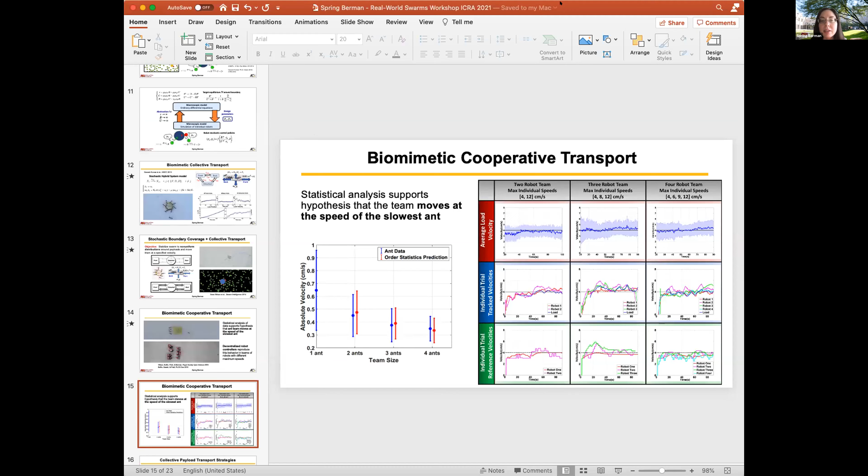Thanks for inviting me to this workshop. I'm Spring Berman, associate professor of mechanical and aerospace engineering at Arizona State University. Today I'll be talking about my group's efforts to develop decentralized control strategies for collective transport of payloads in unknown environments with obstacles, and the various steps we took and are still taking to get there.

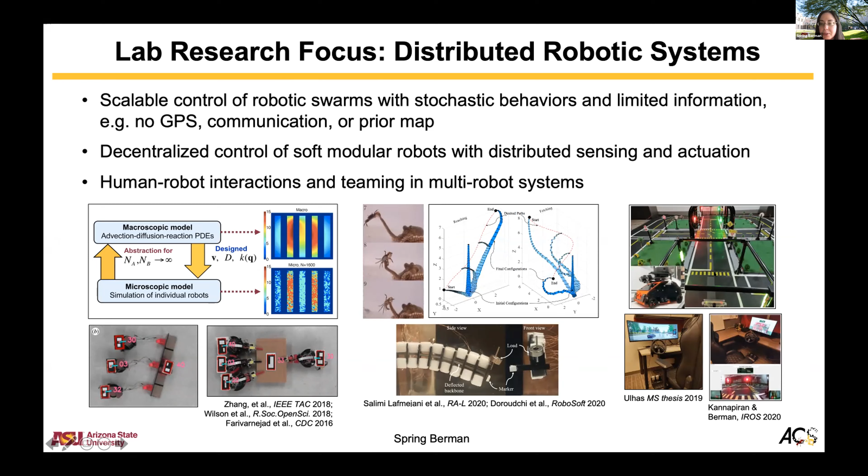Just a brief overview of my lab's research. My lab is the Autonomous Collective Systems Lab, and broadly our focus is on distributed robotic systems. A lot of the research is on developing scalable control strategies for robotic swarms with very limited information and capabilities, and stochastic behaviors. We've also done recent work on decentralized control of soft modular robots with distributed sensing and actuation inspired by octopus arms. And we're working on human-robot teaming and interactions in multi-robot systems, including traffic testbeds with autonomous vehicles.

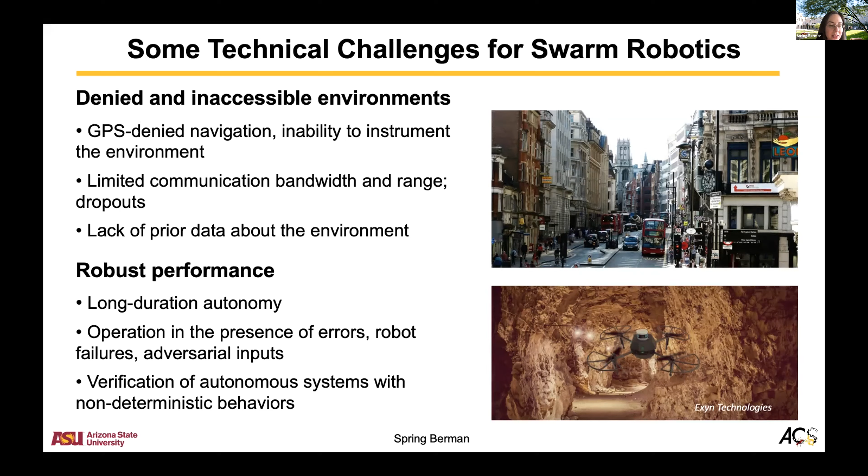There are various technical challenges for swarm robotics. Swarms might need to operate in denied and inaccessible environments where GPS is not available. There's limited communication bandwidth and range, communication dropouts, and the robots might not have prior data about the environment, or the environment might be changing. We want to design robot control strategies suitable for long duration operations, where robots make decisions on their own without supervision. We want the performance of the swarm to be robust in the presence of errors, failures, potentially adversarial inputs. And we want to verify or theoretically prove that the swarm will produce the desired behavior even in the presence of uncertainties and non-deterministic behaviors.

Often in swarm robotics, we look to examples of biological swarms that have managed to survive and do very complex collective behaviors, subject to these constraints. Some examples are nest site selection and construction by honeybees and certain species of termites, predation avoidance by schools of fish, and flocking.

We want our swarm control strategies to be scalable with the number of robots, and a way to achieve that is to design decentralized control strategies for the robots. There, the robots rely on local sensing, their own onboard computation, and local or no inter-robot communication. Again, we want the strategies to not necessarily rely on prior data about the environment, to be robust to disturbances and failures, to account for stochastic behaviors, and to have theoretical guarantees on performance.

I'm going to talk about our work on developing control strategies with these properties, specifically for the task of collective payload transport. This is the problem of controlling or designing controllers for a swarm or group of robots. Oh no, sorry, the fire alarm in my apartment went off.

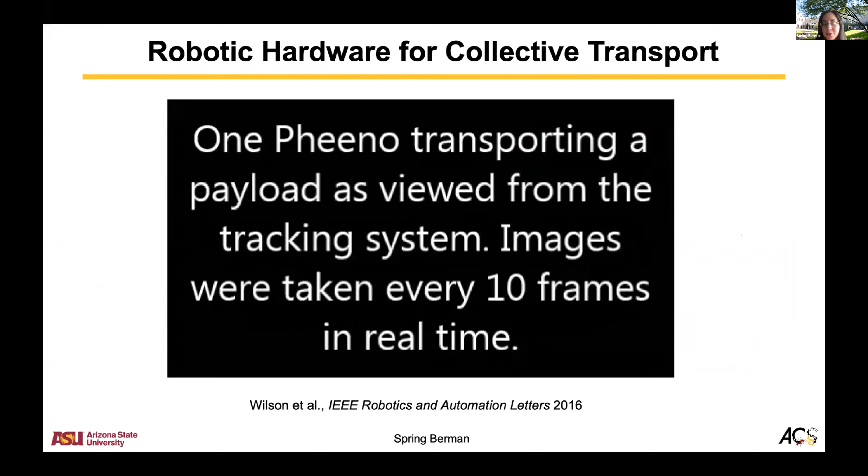So ants are a good model for various reasons. They don't have to know about the load that they're bringing back beforehand, and they can do this behavior in all sorts of environments, around obstacles and over rough terrain.

So we wanted to investigate this behavior. I guess we really started out looking at the biological model, and then in tandem, we also wanted to experimentally verify our strategies.

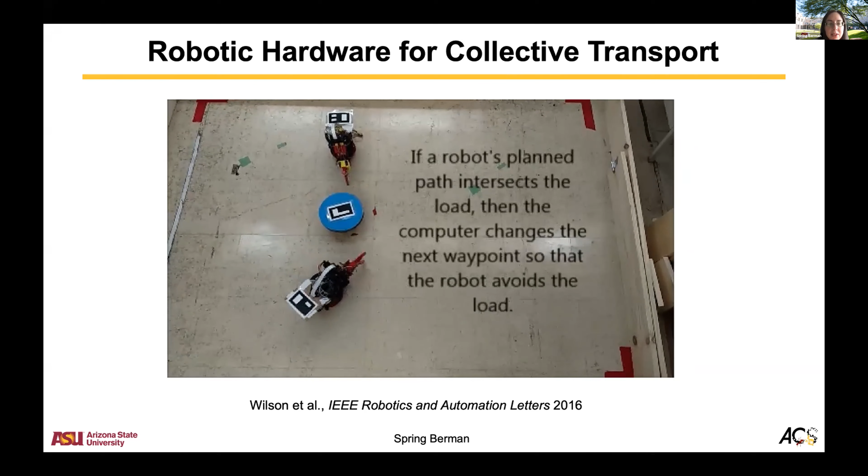So we built a small mobile robot platform called Pheeno, that you can see in the video here. It has a multi-degree of freedom manipulator arm, so it's capable of doing single and cooperative transport.

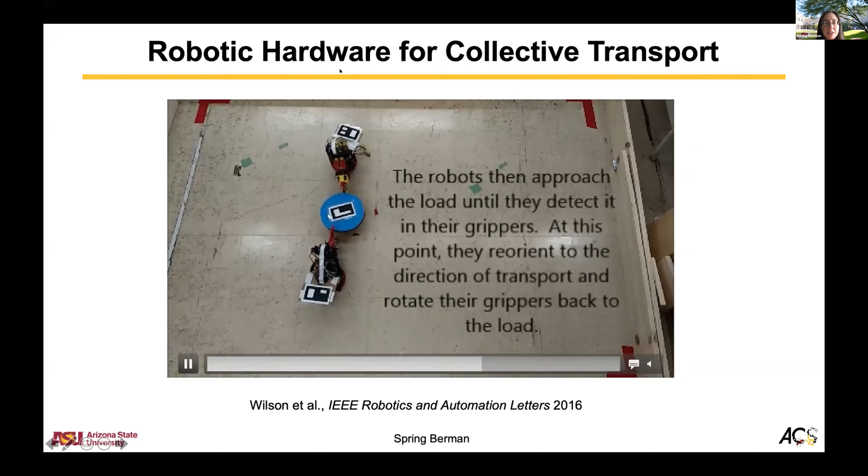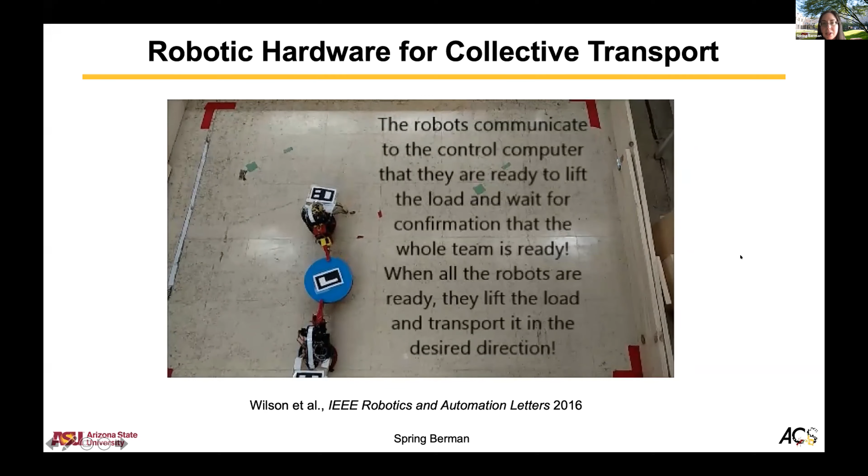This is just an example using some local sensing, but some centralized commands, to get the two robots to move the payload to a destination. So that's just showing they're physically capable of doing collective transport. Some of the videos of experiments that I'll show use these robots.

I'm going to talk about our work on various types of strategies that are decentralized, do not rely on communication or prior information about the environment, the payload, or the robot team - that is, the number of robots or their distribution around the payload. In some cases, the robots do not have GPS.

So I'll talk about a couple of ant-inspired strategies for collective transport. To start out, I want to give an overview of the control framework that we're using in order to instantiate these bio-inspired strategies.

This approach uses what's called a mean field model description of the population dynamics. The mean field model takes the form of, or can take the form of, ordinary or partial differential equations that govern the density or population of robots in different states over time.

The particular mean field model shown here is an advection diffusion reaction PDE in which you can design the parameters - the velocity field, the diffusion coefficient potentially, and the transition rates that govern robot state switching - using the PDE, and then map them onto the robot control policies to basically control the density of robots and their activity over a domain.

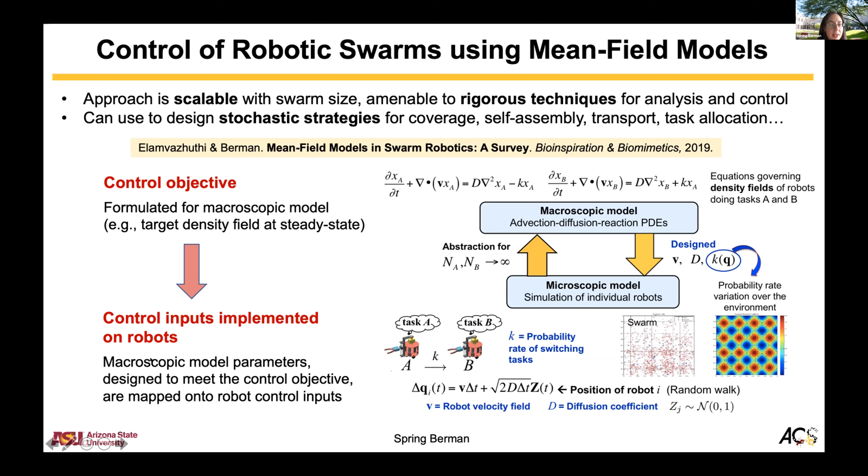In terms of the collective transport problem, we formulated this as a mean field model in which the states are populations of free robots that are searching for a payload. The other states are the numbers of free and occupied zones on the payload, represented by these green and red circles here.

So the goal that we wanted to achieve is to design the robot probabilities of binding and unbinding from this payload to get target populations of robots around the boundaries.

Just briefly, this is what our control framework looks like, in which we have a macroscopic model with equations that describe these encounter-based interactions of robots with the payload and then their unbinding.

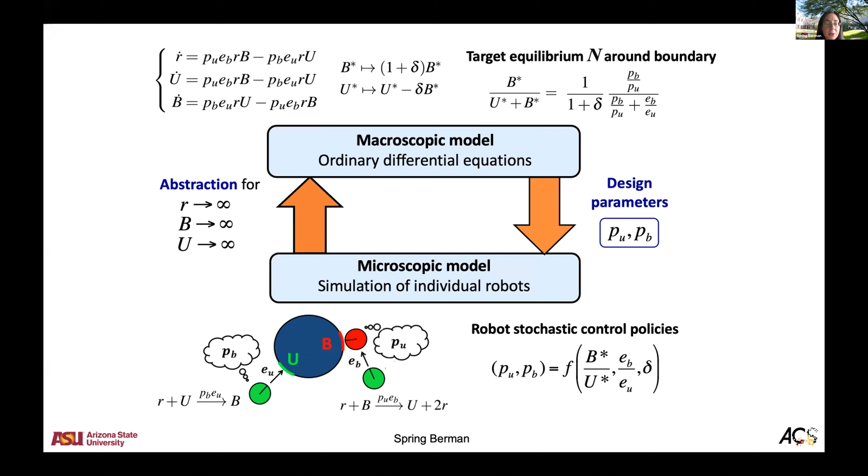We can use this to design the probabilities of binding and unbinding in a way that does not require us to measure specific encounter rates of the robots, and in a way that turns out to be robust to a large range of robot populations and numbers of payloads.

We also had these biological observations of collective transport by ants that are moving a, well, it's a fake food item - a dime glued to a piece of foam and then flavored with fig paste, so the ants think that it's food.

Stephen Pratt's group took multiple trials, or videos, of different colonies doing this transport behavior. From these videos, we extracted data that we fit to a stochastic hybrid system model, where the ants in this model are switching between states defined as back of the load, front of the load, or detached.

We also coupled it with a simple dynamic model in which the ants are moving this payload and they achieve a target velocity, or a final steady state velocity, which is pretty consistent, as we saw from observations.

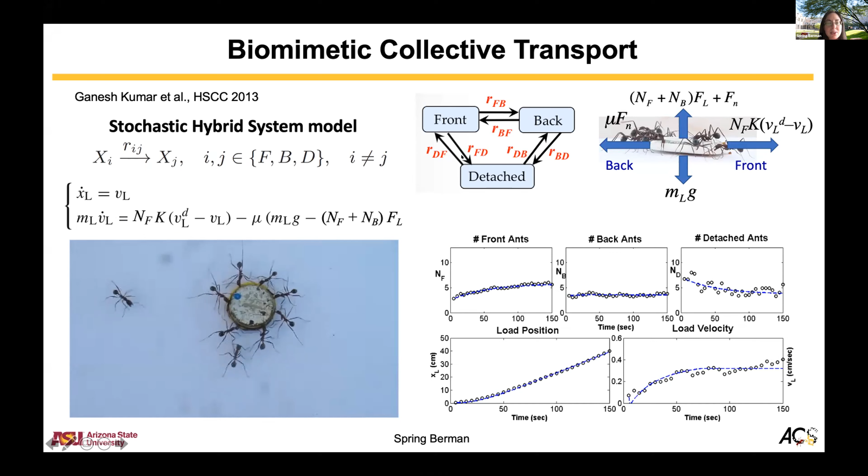Okay, so this is a demonstration of...

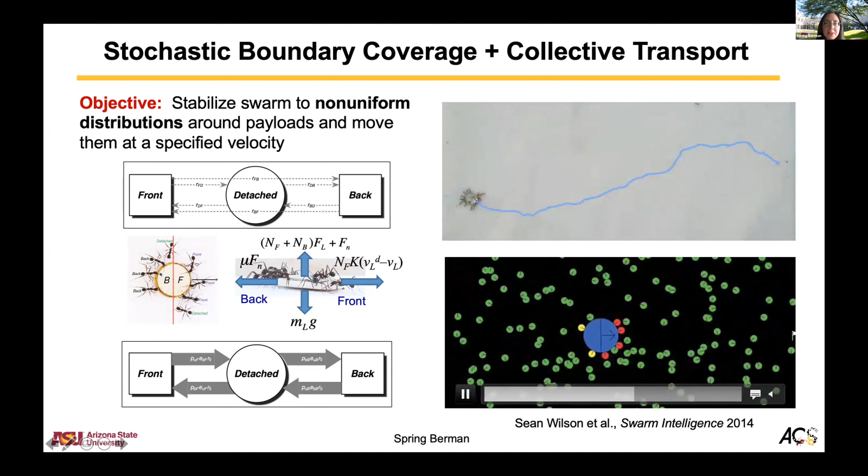We translated our biological model of collective transport in ants into a controller that could be implemented on robots. In the robot controllers, we also have the guarantees from the mean field model that our swarm will converge to target allocations around the payload. We get a similar distribution of robots around the front and back of our simulated payload, and they transport it to a target, ant-like velocity. We can use this model to replicate certain features of the ant transport dynamics.

Here is some more recent work in which the ants are now pulling, or towing, a payload made of a bunch of straws taped together. So now they're basically moving in just one dimension, which simplifies the problem somewhat.

What we found is that the data supports the hypothesis that the ant team moves at the speed of the slowest ant. So now we can incorporate heterogeneity into our ant swarm model, where some ants are maybe more tired or stronger than others, moving at different speeds.

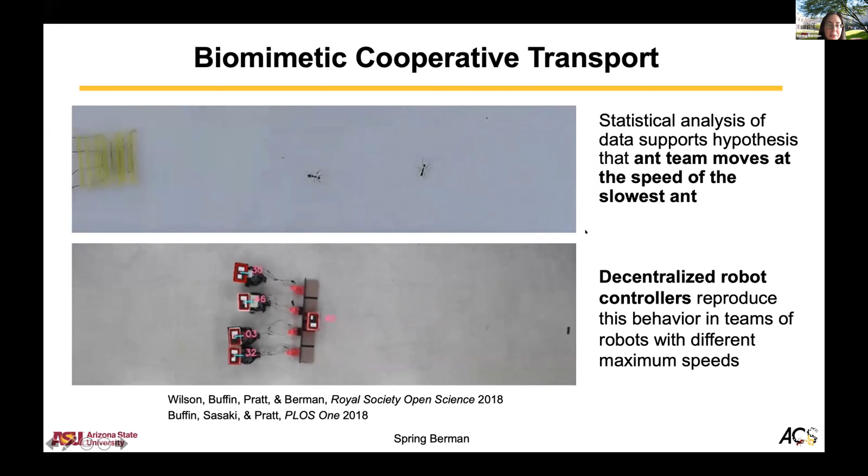We replicated this behavior in decentralized robot controllers with different teams of robots. The controllers were based on reinforcement learning algorithms, and the robots have force sensors so they can adjust their pulling force. We found that we could replicate this behavior of the group of robots moving the payload at the speed of the slowest robot.

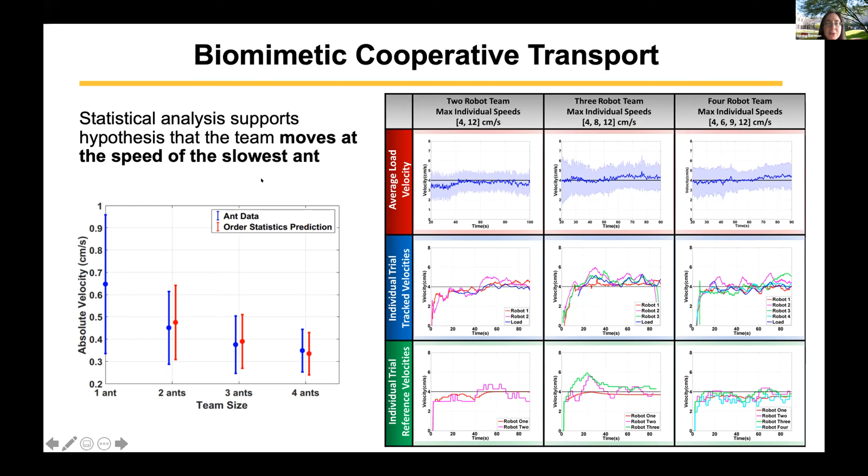Probably not the most useful behavior if you're trying to get robots to move things around a warehouse as quickly as possible. But it can potentially accommodate robots with different capabilities or power levels, in order to potentially reduce the energy use across all the robots, even if it doesn't get the payload there as fast as possible.

So those were a summary of our bio-inspired collective transport strategies. We also developed some controllers that were more loosely inspired by ants, in the sense that they are decentralized and rely only on local information.

We started looking at the problem of collective transport of a payload at a target velocity without any GPS measurements. The robot team is just given the target velocity to move the payload in, and we account for the fact that they have manipulators and can grasp the payload in any configuration. They're not communicating with each other and have no information about the payload or the other robots. What they can measure is their own velocity and heading, and their manipulator angle and angular velocity.

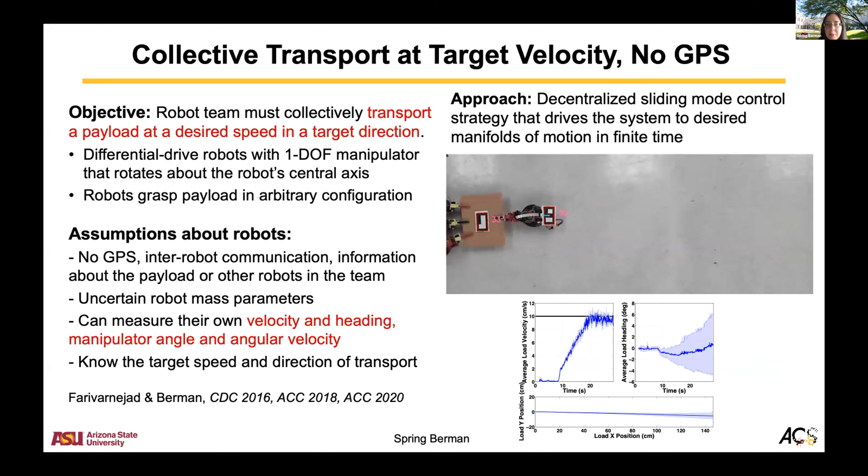We developed a sliding mode control strategy that we can show will drive the transport team to the target velocity in finite time. We verified this with our Pheeno robots.

Similarly, we looked at a similar problem in which we tried a decentralized adaptive controller, made compatible with the nonholonomic constraints between the robots and the payload, so that we could implement it on these non-holonomic mobile manipulators.

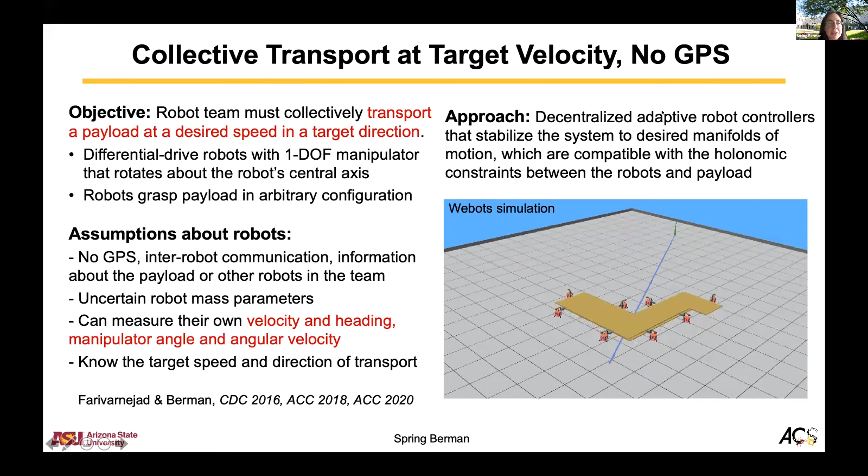Now we introduce obstacles into the environment, specifically convex obstacles. We look at the problem for a single robot navigating to a target velocity without colliding with the obstacles or getting stuck between them. The robot does not have GPS. This is a preliminary step towards collective transport through an environment with obstacles.

Here we model a set of obstacles. The robot only knows its velocity, its heading, and the minimum distance from any obstacles in its sensing range. In this approach, we use a switching control scheme with virtual potential-based controllers. We can show that for certain bounds on the parameter of the potential field, the robot won't get stuck on the switching surface between obstacles, and that it will converge to the target velocity.

Here's a simulation of this behavior and a full trajectory of a robot going through a set of obstacles. There's a little bit of oscillation on the switching surface, but the robot does not get stuck.

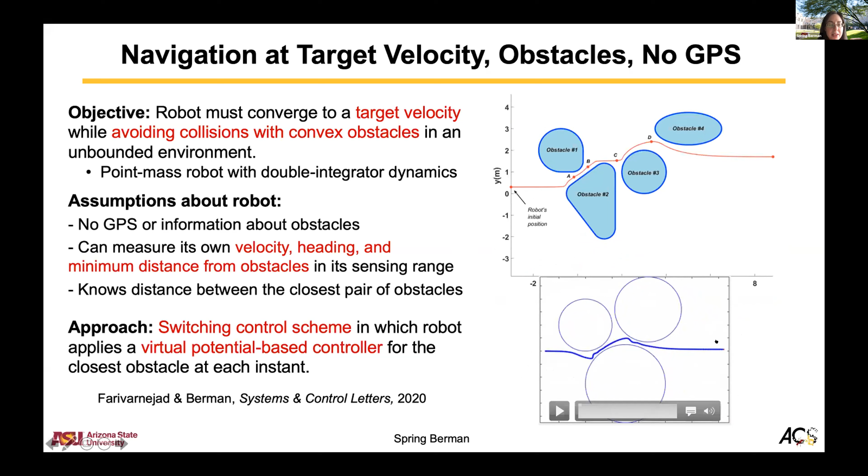Some current work we're doing now is on single robot navigation and collective transport to a target position in a set of convex obstacles with GPS measurements. The difference here is that it has to navigate to a target position, and the robots can localize themselves. But a lot of the problem is similar in that we don't want the robot or the payload to collide with any obstacles. We want to get the robot or the center of mass of the payload to the target position.

Again, there's no communication, no prior information. The robots can measure their minimum distance from obstacles in their sensing range, and their position, velocity, and heading. The approach we've been taking is to use a function similar to navigation functions in the sense of Rimon and Koditschek, with slightly different properties, in order to prove that the system is going to converge to the target equilibrium position.

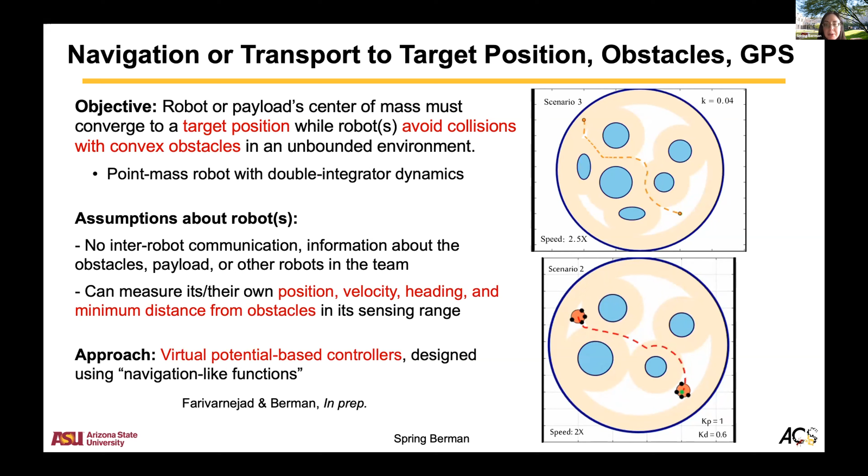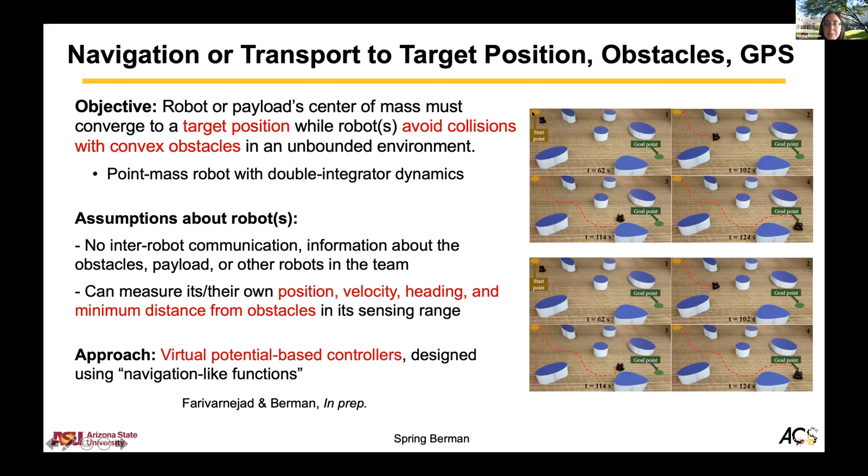So we've done some robot experiments to verify the single robot navigation case. This is actually with a TurtleBot3 Burger, rather than a Pheeno.

So just to conclude, going forward we are considering developing controllers in environments with non-convex obstacles, because of course not all obstacles are convex. So we've started looking at collective transport in 3 dimensions. This is a video from a recent paper where the robots are trying to move this payload to a target position, again with no communication and no prior information. And of course we would like to implement our strategies in robots in environments with obstacles.

All right, so I think I will stop there and just acknowledge my lab group and the funding sources that have supported this work. I'm happy to take any questions.

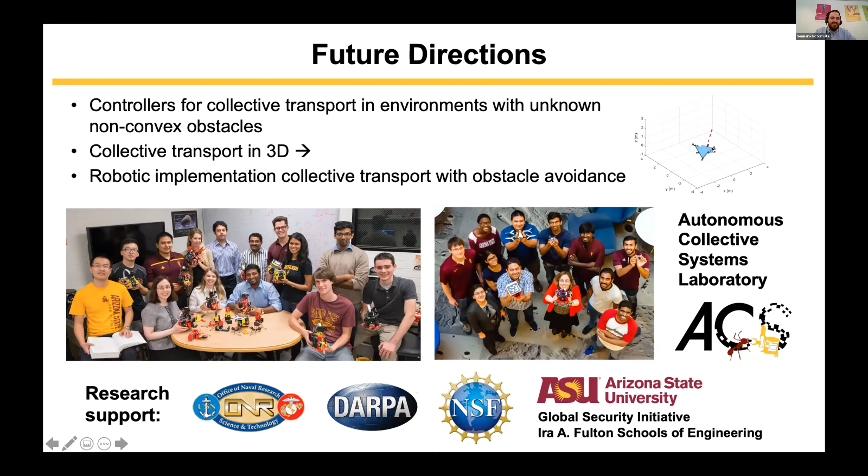Thank you very much, Spring, for a really interesting talk and for finishing right on time. Thanks, so yeah, despite the small accident during the talk.

So we actually have already a question, I think I can see on Slido. But maybe before that, let me ask you a question on the future work. You said you're going to work on extending the collaborative transportation with obstacles which are non-convex. Why can't you use navigation-like functions which also work with non-convex obstacles? What is the obstruction there?

So I believe it doesn't have the same type of properties, or you can't prove the same results. In navigation functions, the functions are basically functions of the geometry or the shapes of the obstacle, so you need to know that beforehand. But in the functions that we're using, there is no knowledge of that geometry, they're only based on local sensing. And with those kinds of properties, you can get stuck.

Yeah, so I guess that works assuming that the obstacles are convex. Yeah, okay, makes sense, thank you.

So let's see, from Slido, I can read you this question about robustness of implementation of the collaborative transportation with non-holonomic robots. If there is a small angle error, this could lead to object deadlock. How do you cope with this problem, if there's an angle error? Yeah, so I guess, how robust is the implementation of the collaborative transportation when you use non-holonomic robots? You said I think it's possible to consider those kinematic constraints, but I think the question was about the robustness of these.